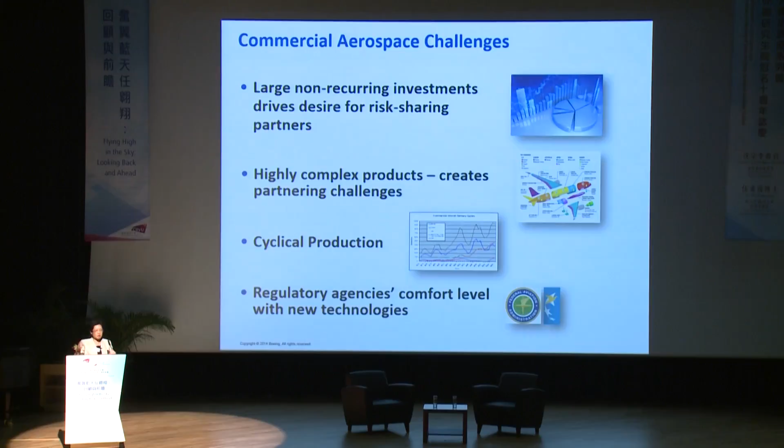And that's associated also with the fact that modern aircraft are much more complex and require a lot more multidisciplinary collaboration to make it happen. Also, aircraft manufacturing demand is typically cyclic, which results in a cyclic production challenge for aircraft companies as well. So we need to have a way to deal with that and to share the risk.

And of course, there are regulatory agencies' concerns about adopting new technologies because of the risk-averse mentality to a certain extent, but in one way it's also correct because we want to really ensure safety. And that also means that for aerospace applications, for any brand new technology to be adopted, 10 to 15 years is the realistic time frame in order to test out really the feasibility and the reliability of the technology.

So modern commercial aircraft structures going forward will put a lot of emphasis on weight saving, because with weight saving you will reduce the cost, but also reduce environmental impact by reducing fuel consumption, for instance, and therefore reduce CO2 emission.

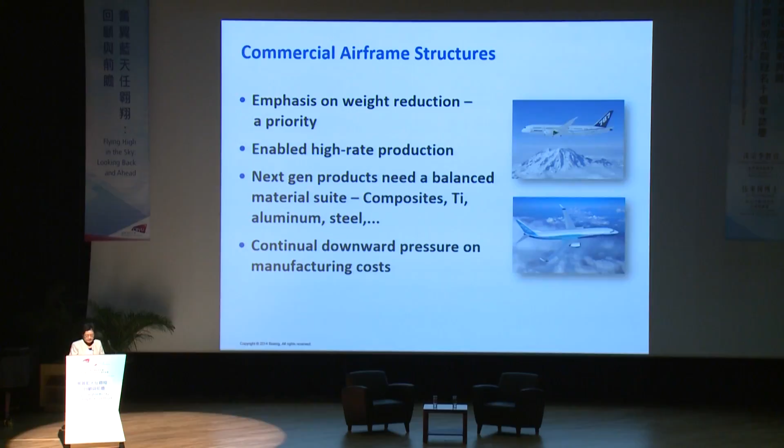As we know, the 787 probably is the first commercial aircraft that has used a lot of composite material, 50% by weight of the aircraft material being used. Over the years, you can see that composites were used first on military applications to test them out, and then gradually increased on commercial aircraft.

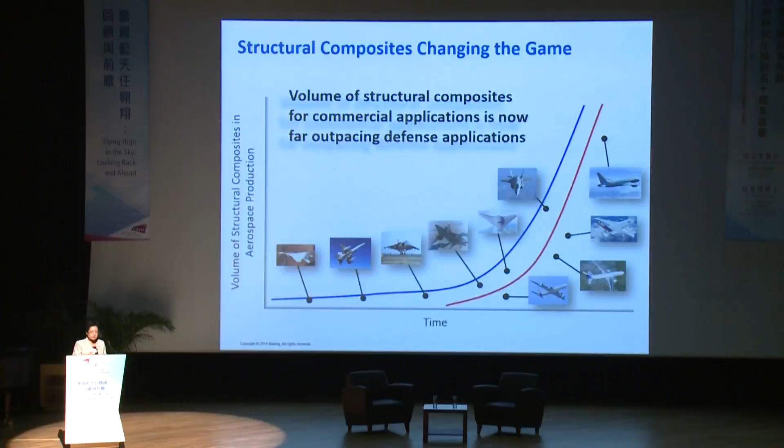So now both the 787 and the Airbus 350 are using more than 50% composite material. So it does change the game. It enables much more efficient weight reduction, and therefore there's less fuel consumption. You can fly longer for the same tank of fuel.

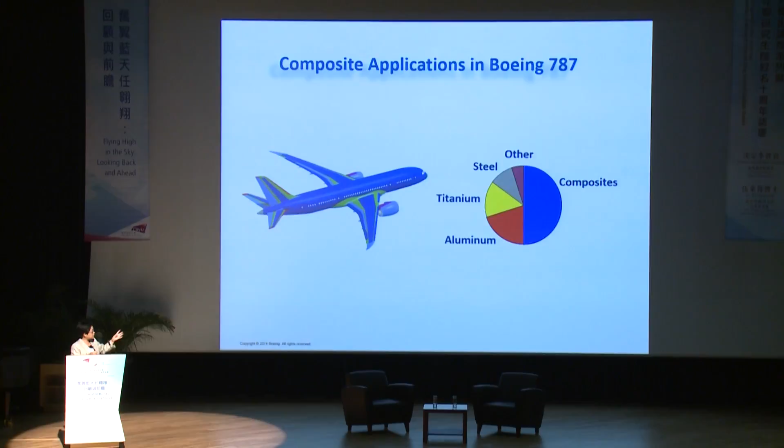So I talked about the composite application in the Boeing 787, and traditionally aluminum was used much more than composite. But as you can see now, composite is about 50%, and some of the use of metal has been taken over by titanium; steel has always been there. So as you can see, with the modern development of materials and structures, it does shift how the actual material type is being used in aircraft manufacturing.

Apart from, of course, materials and structures innovation, a lot more other innovation has been incorporated into the 787 Dreamliner, which includes innovative systems technology, flight deck, engine and nacelle, as well as wing design. Overall, those innovations for the 787 have led to a 20% reduction in fuel and carbon dioxide emission, for instance, and also below 2008 industry limits for nitrogen oxide emission, and huge improvement in noise emission, as well as reduction in maintenance cost.

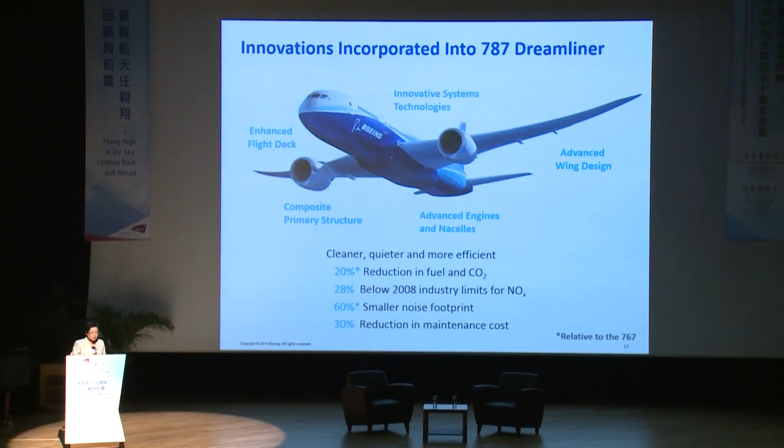So as you can see, the innovation of the technology overall, as well as the material, has led to significant improvement of aircraft performance. If you see on this graph, over the years there is a significant reduction both in fuel consumption and in noise level for the aircraft. In the early years, in the 50s, compared to now, the improvement is huge. For instance, it's a 70% improvement in fuel consumption and CO2 emission, and a 90% reduction in noise as well, due to that continuous improvement and innovation.

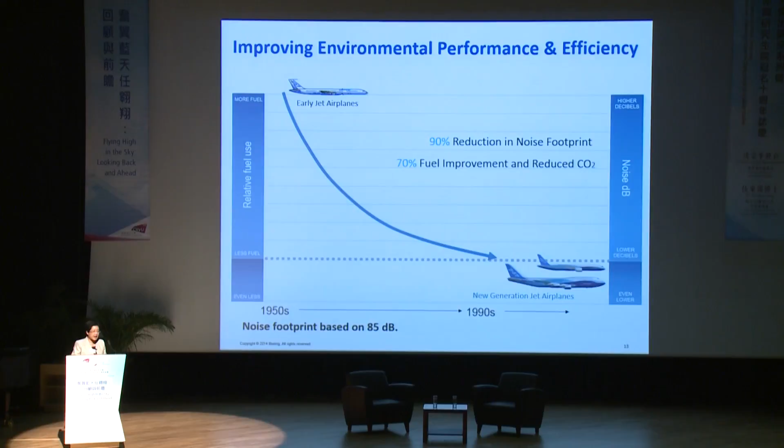So the evolution of composite usage in commercial aerospace is due to a combination of all these. One is improved material technology, through development of higher strength and stiffer fiber, as well as the resin itself. Also, the new material comes with new manufacturing technology that enables it, including automated processes so that you can make the aircraft faster, as well as improved analysis and modeling.

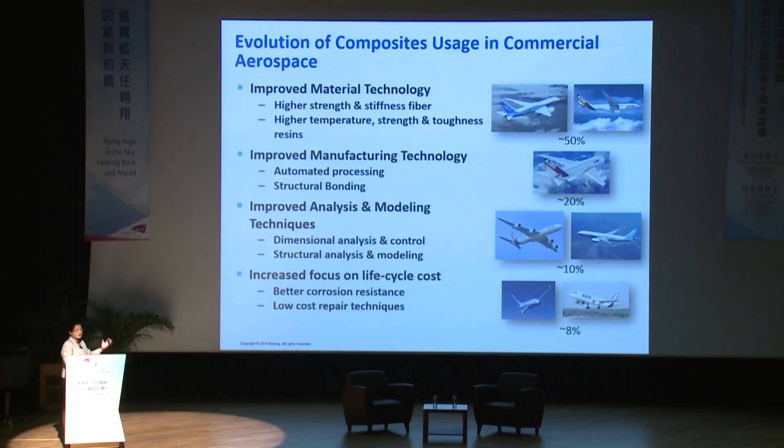So it's not all by trial and error. You actually develop some simulation that can help you fast track both the development and the testing of the new materials and structures. There is also an increased focus on life cycle cost, not just material cost, but component cost, as well as the whole life cycle cost of that component being taken into consideration.

So of course, being a new material system, there are lots of challenges associated with composite application as well. Traditional tools have been designed to design and monitor metals, but now it's composite. They have different material characteristics. So you do need to develop that, and the engineers need to be trained to be able to master those tools and analysis as well. So that's one part of the challenge.

And of course, there are electromagnetic shielding issues because composite is not as conductive as metal. So you need to build in lightning strike resistance, and also you need to consider its connection with other metal parts. So there are a number of issues we need to look at: heat distortion, and also how to link well with other materials such as titanium and fasteners and coatings, etc.

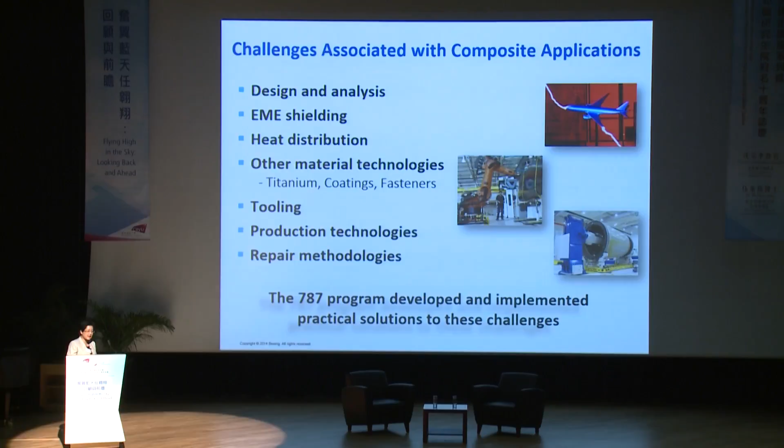So I talked about the 787 before. Through this program, we really productionized the large composite structure manufacturing itself through the tooling, fabrication, how to bond it with other fasteners or with other stiffeners or other metal reinforcement structures, and how to inspect it. And you can see the inspection is huge, how to make sure it's reliable and repeatable, and how to assemble it as a whole, as well as the repair. So that program itself has allowed us to gather a lot of experience in composite applications.

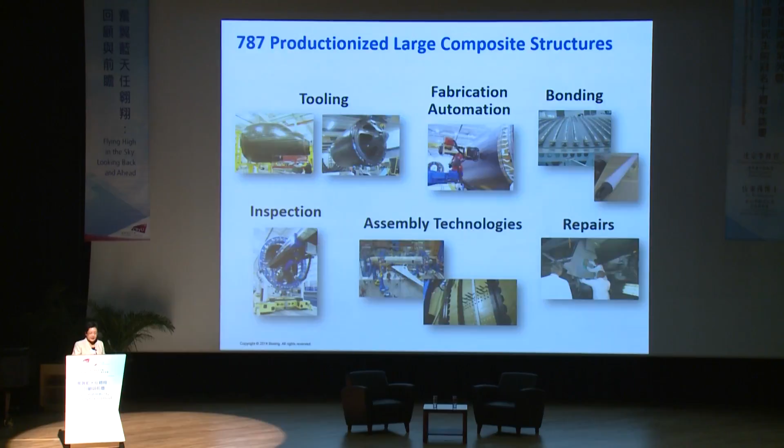So looking forward for continuous improvement, we'll be very interested in multifunctional materials, which means that instead of putting multiple materials to perform multiple functions, we would like to see one material, for instance, perform multiple functions. In that way, you can achieve weight reduction and cost reduction, etc.

So we are also putting a lot of emphasis on multi-scale modeling and simulation of structural performance. That means that instead of relying on trial and error each time, we want to build a big database whereby you can predict through simulation and models more realistically the performance, so it can shorten the development as well as the testing and qualification cycle for developing a new aircraft model.

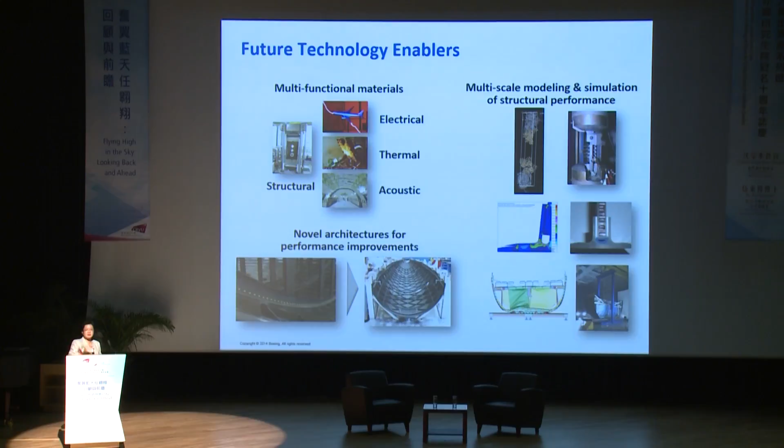So we are also interested in looking at novel architectures for performance improvement, like integrally stiffened structures, etc. So as you can see, there's still a lot of room for us to innovate, and everyone here can contribute to that.

So other future technology enablers include flexible automation. In the past, for aircraft manufacturing, you had all fixed jigs, but now it's about flexible arrangements, so you can make the factory more flexible and more adaptable. So that's one of the future trends. And also, we will be interested in looking at materials that are environmentally responsive.

Surface chemistry and coating is certainly one area we also want to look at to enhance the performance of the aircraft, both for anti-ice and improvement of aerodynamics. And there are a lot of functional coatings that can contribute to the overall aircraft performance that we're looking at, as well as inspection and effects of defects. Are there other faster and better methods of inspecting the aircraft to ensure reliability?

So despite all the progress that we have made, there are still a number of ongoing challenges, such as speed: how fast we can come up with a concept, validate the concept, and certify the actual material or the parts. Currently, as I said before, it still takes about 10 to 15 years. So can we do it faster, and how to do it faster without compromising safety and reliability?

So we also need to be mindful of the fact that we cannot just develop a material but not be able to make it in a reliable, consistent, robust and cost-effective manner. So that will be another area that we need to look at. We cannot just develop a material without considering its manufacturability at a larger scale.

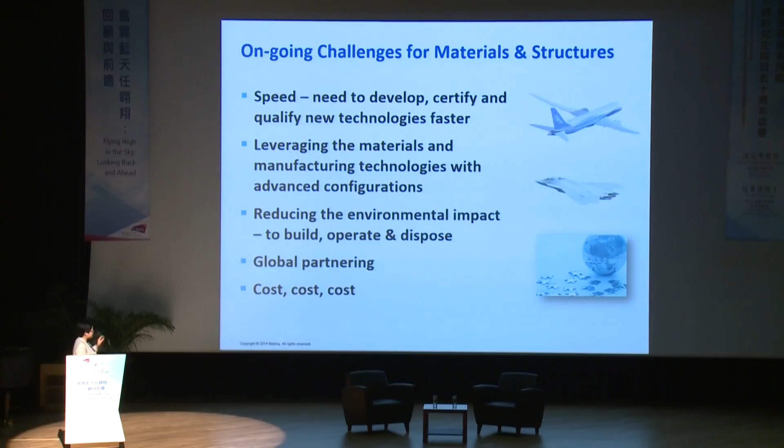And also, the other increasingly important factor is how to reduce the environmental impact to build, operate, and dispose of our materials. So we'll continue to partner globally. So at the end of the day, innovation needs to be achieved in a cost-affordable manner. So that's a very important part of it.

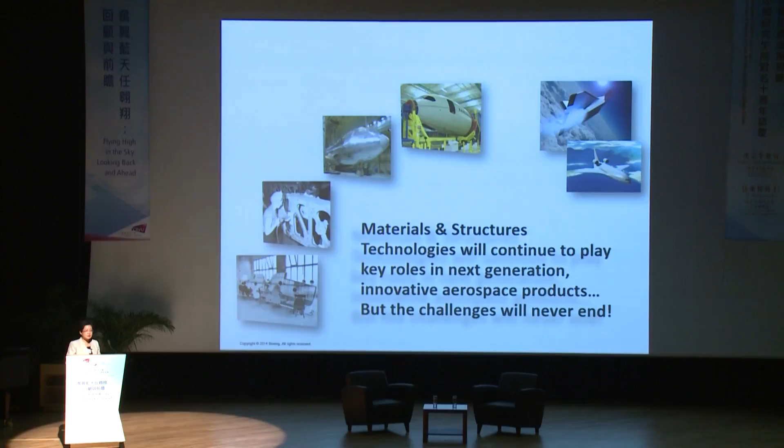So as a summary of the materials and structures section, we can see material and structure technology will continue to play key roles in the next generation of aerospace products. However, there are lots of challenges for us to work together and overcome. So Boeing does engage globally in the development of technologies, as you can see here.